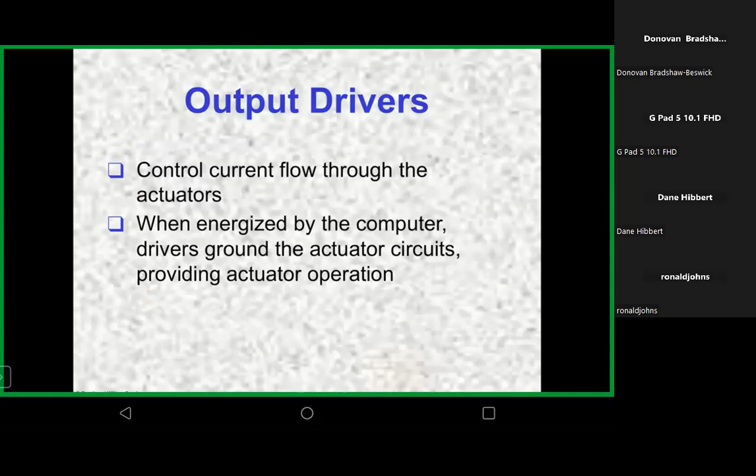Processor memory bus is a pathway by which sections of a computer communicate. The microprocessor controls this flow of data, writing data about vehicle operation into memory, and reading data about how the vehicle should operate from memory. So it always has a reference. If it gets information from sensors, and based on that information, it determines this is not how the vehicle should be operating, it will either trigger the light and say something is wrong, when compared to memory.

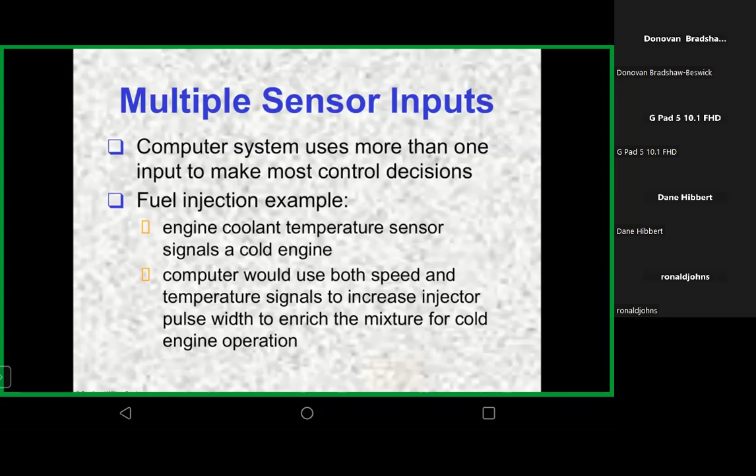All right, multiple sensor inputs. So the computer system uses more than one input to make most control decisions. A fuel injection example: the engine coolant temperature sensor signals a cold engine. So with a cold start, the computer would use both speed and temperature signals to increase injector pulse width to enrich the mixture for cold engine operation.

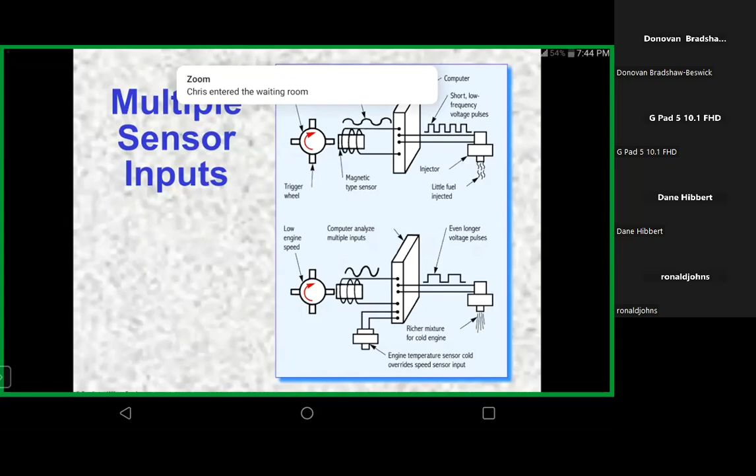And this is an example of that. So we have low engine speed, our trigger wheel, and low frequency going in. We have a computer and short low frequency voltage pulses, so very little in short pulses - say you have the fuel basically trickling from the injector. In the picture below, you actually see the frequency increase with the cold start, and the temperature sensor is incorporated in this. So the engine temperature sensor cold override takes precedence over the speed sensor input.

And then we have our even longer voltage pulses, and we have more fuel going into the cylinder for the cold start operation.

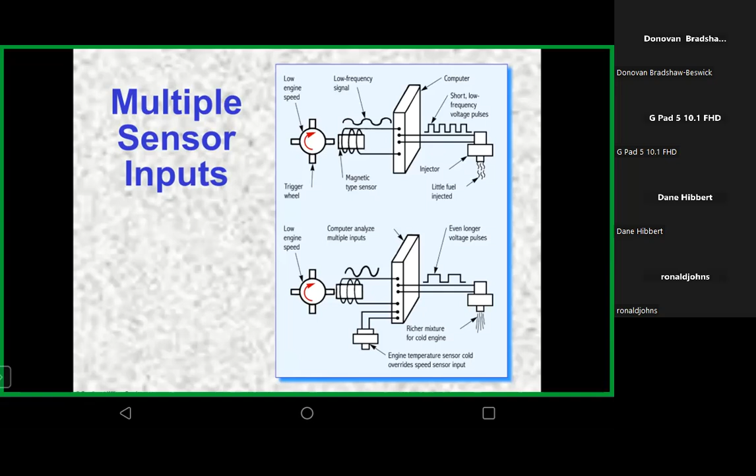Computer networks are a series of computers that control different systems but work together to improve overall vehicle efficiency. They share wires, input signal and output signal. Computers exchange data from sensors to prevent duplication of parts and to reduce wiring.

So what that actually means is multiplexing, or you can call it CAN communication lines. You can have that as an example, like me now. Say for instance I am a sensor talking to you guys, and instead of calling all of you individually on your phone, we just do a conference call. So I can communicate to all of you through one line.

So would I have a reduction in the number of wires? We'll have lighter components. So one person speaking, everybody hearing. Same thing with the computers communicating with each other.

But the thing with that though, the computer that actually needs that information will use it, while some will just let it pass because it's not related to them. So you have the information passing, whoever wants it takes it. The sensor speaks to everybody, so whoever has use for it goes and uses it.

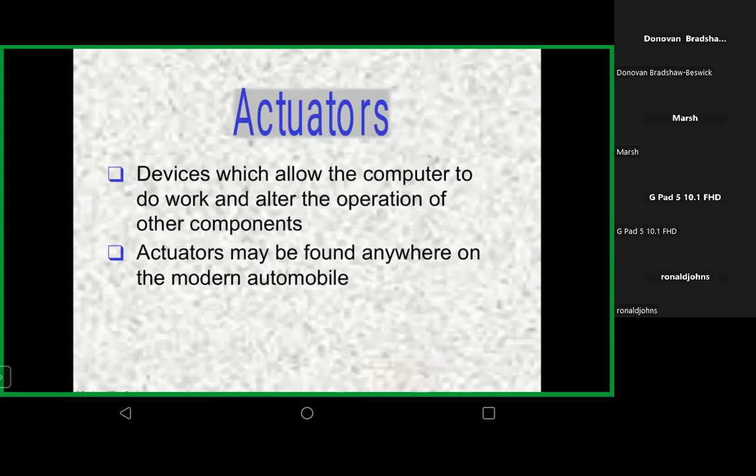So actuators would be like the computer sending out a boy - alright, do this, so it does that. So it actually commands them to do work, right? And sensors now would be like messengers, in other words. So one is a messenger and one is a send-out boy, in layman's terms.

Actuator classification - actuators can be grouped into the following categories: solenoid, relay, servo motor, display device, and control modules.

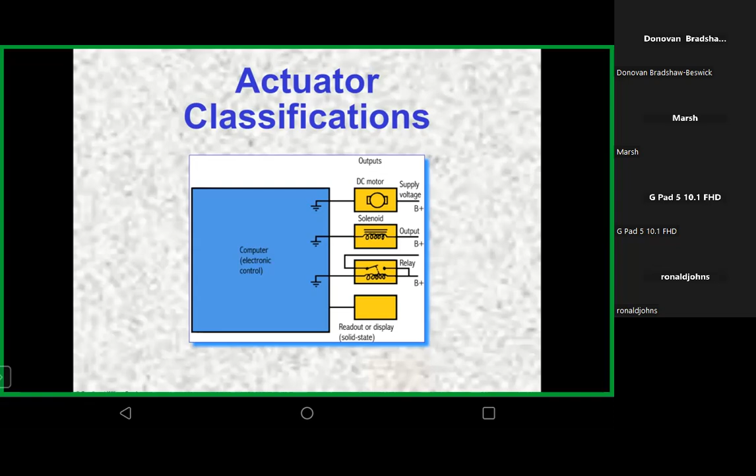Actuator operation - when the computer turns on an actuator, it normally provides the device with a ground circuit, as I was saying. Current can then operate the actuator.

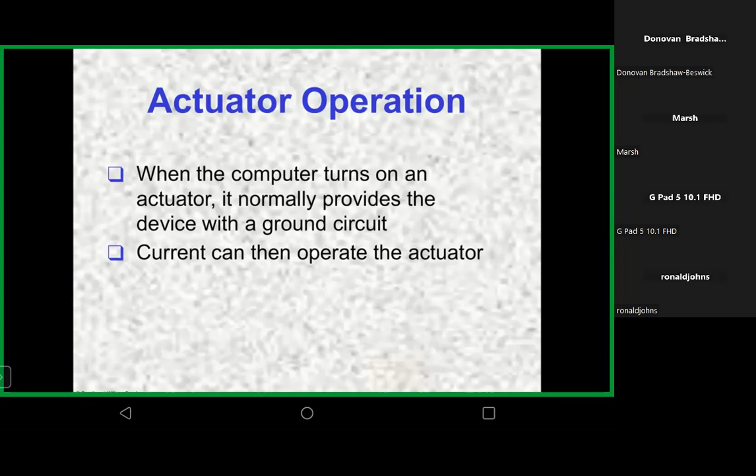So the computer actually - no, the processor actually communicates with the actuators through drivers. For instance, if you apply 12 volts to a light bulb, if no ground is present at one leg, the positive will go flow through the bulb and go through the rest of the circuit. So they do that so you don't have 12 volts flowing into the computer itself and burning the microchip. So the driver, as I can see, is a diode.

That little triangle sign shows the direction in which the signal can pass - it's a valve, in other words. The diode is a valve. You follow? So if the computer is not sending a ground, the positive will flow through the actuator and back into the circuit. It will stop right at the driver - it can't pass unless the driver is malfunctioning. Then you will have the current flowing in the wrong direction and damaging the computer itself.

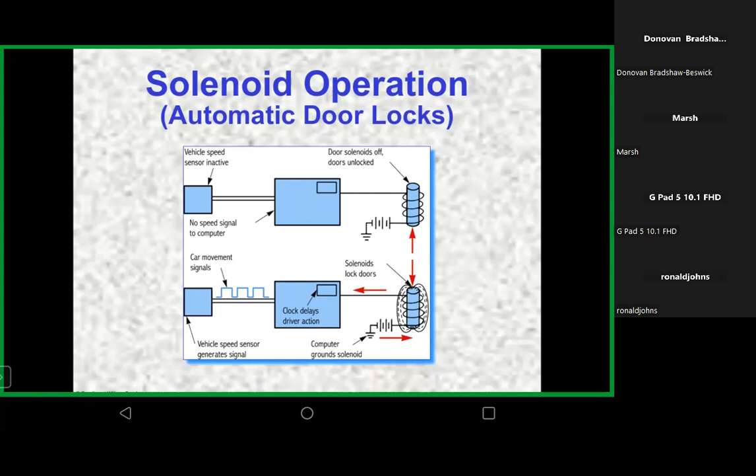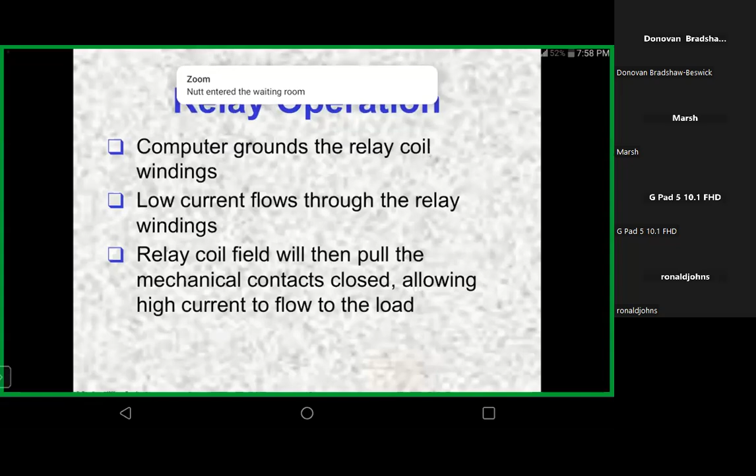Anybody know what a relay is, or how you would define a relay? A relay basically is a switch.

Any other deeper definition, more in depth? Simple, but more detail. Yeah, a relay is basically like a coil which operates off of magnetism. So once energized, it creates a magnetic force inside which then pulls down one side of the circuit to close the circuit, or open the circuit, depending on which type of relay it is. I have like 5-pin relays that are normally open or normally closed.

So basically we can say a relay is an electromagnetic device that uses a small voltage to control a larger voltage, right? And the reason why I use that definition is because, say for instance, the ignition bar, especially with button start vehicles, uses like 20 gauge wire, very small wires. So just imagine those small wires running directly to the starter. As I press it, the circuit should burn up. So what they do now is just use small wire.

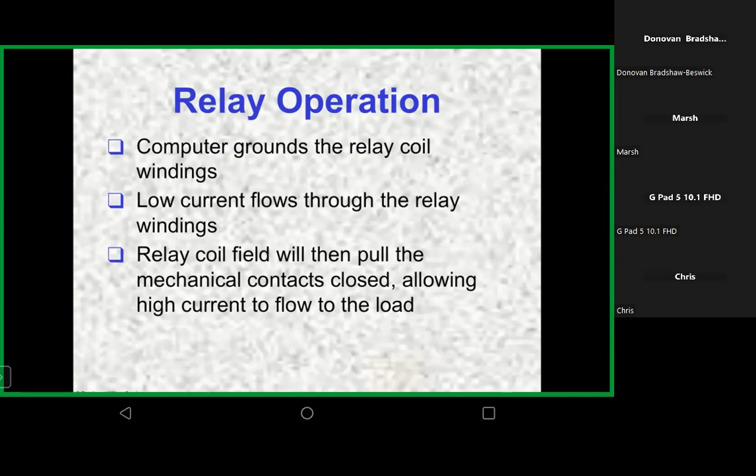Or a small load to control a high load or a large load. All right, so relay operation.

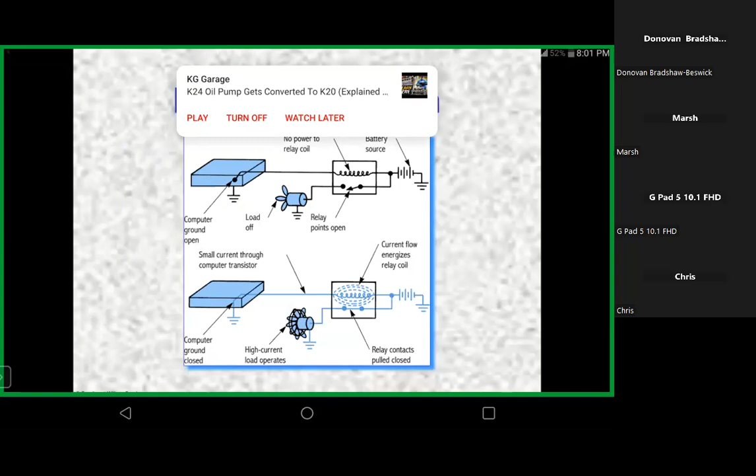Once the computer is grounded, the relay is energized. That magnetic field actually closes the switch and then current flows from the battery to that fan or motor, whatever it is. The top diagram shows when it is not energized, and the diagram below shows when it is being energized. So high current load actually operates the fan.

Yeah, hello? Yeah, I'm hearing you. I just reached home, so I switched now to my home Wi-Fi.

Sorry about that. A transformer could be considered an actuator too. Transformer.

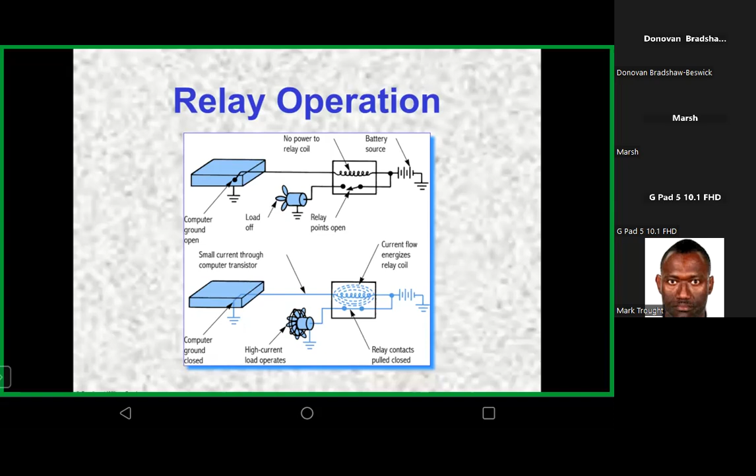I'm just trying to think. No, I'm going to say that because the computer wouldn't actually command the transformer to do anything. The transformer is actually doing its own duty. Okay, that's what you mean. Yes, so its duty is to either step up or step down voltage.

Yes, and it constantly... but at the same time, it's an integral part of the computer because the computer now deals with high voltage, so we always have to have a transformer to actually step down the voltage for the computer, or convert it from AC to DC. So it still works, but I wouldn't consider it an actuator.

Yeah, okay. Understood. Yeah, man.

All right, so the servo motor is our next one. Servo motor operation: the computer can ground the motor circuit for so much time. At no time should you say the computer controls the 12 volt, it's the ground. So for every device we move to, the computer controls the ground. The computer can ground the motor circuit, turning the motor on or off, or reversing motor rotation as needed.

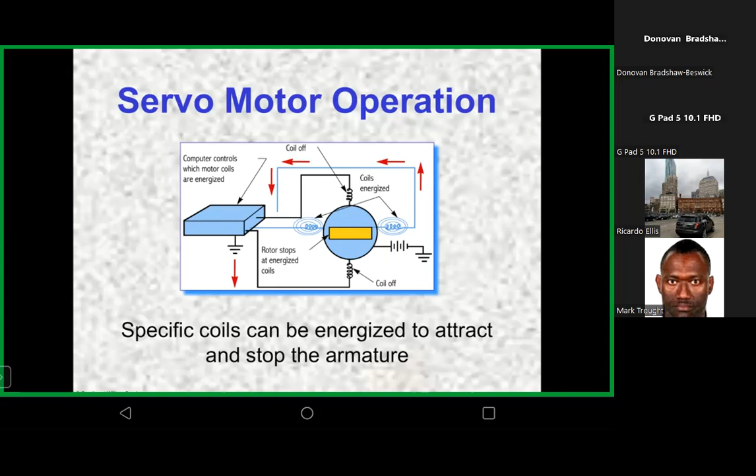So specific coils can be energized to attract and stop the armature. Common actuators used on modern vehicles include fuel injectors, solenoid valves that control fuel flow, and the fuel pump, an electric motor driven pump. Components are endless, so anything you can classify as an actuator is anything that the computer can tell to do work.

Once you turn on the ignition, the computer tells the pump to prime. You're gonna hear the pump prime and stop. Once you turn on the ignition, the computer will command it to spin constantly. If you're stepping on the gas pedal, like flooring it, or increasing the RPM, the computer can tell the pump to spin faster so it can supply more fuel, because more fuel is needed in the rail.

Like for a turbocharged vehicle, at lower boost settings, the computer will command the pump to spin at a certain RPM or speed. As boost increases, fuel has to increase with that, so the pump will actually have to spin faster. So that can be computer controlled and classified as an actuator, something as simple as a fuel pump.

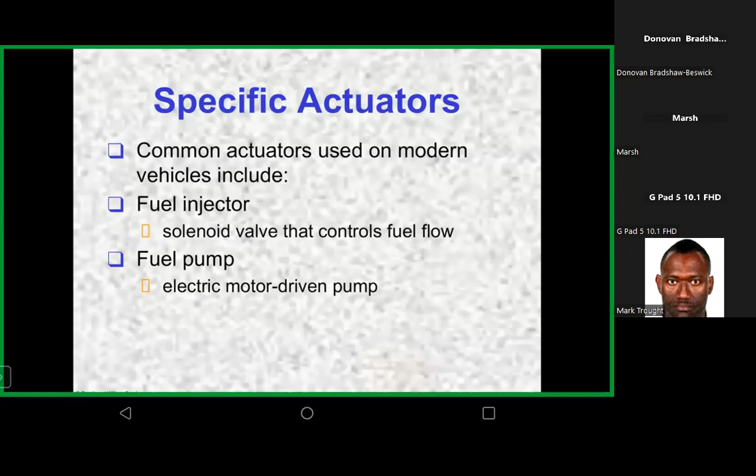Still on specific actuators: the idle air solenoid. That can be like an idle up valve - when you turn on the AC, the valve compensates for the added load so the vehicle doesn't stall, whereas at closed throttle or no throttle position. While some vehicles don't use an idle up solenoid, the electronic throttle body itself, the computer can just change the position of the butterfly to compensate for the AC being turned on, while some just use an idle up solenoid.

That controls airflow into the engine to control idle speed - a reversible DC motor that opens and closes the throttle valve to control idle speed. The EGR solenoid opens and closes small ports to control exhaust gas flow back into the engine.

Now we have our canister purge solenoid, which controls flow of fuel vapor from the fuel tank into the engine for burning, and that triggers during cruise - probably up to 2,500 RPM and below.

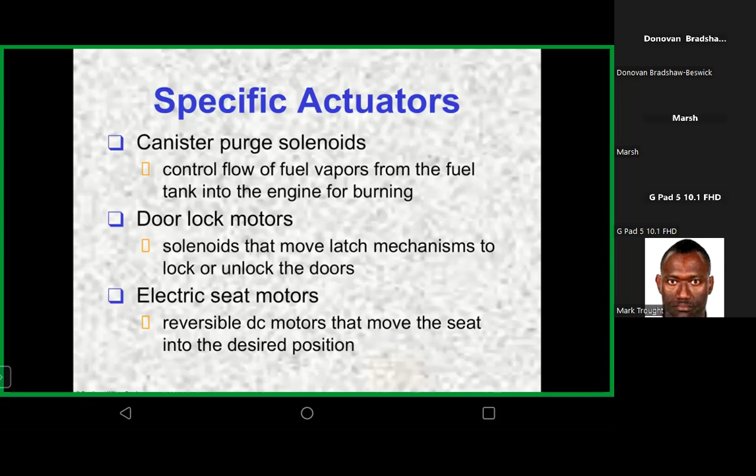So who knows now is going to do it? I didn't mean to cut you off, but it's something everybody should know, it's not even optional. Even the pump attendant should know about it. But I guess the gas station wants to make money too, so they want more gas to get in. We live in our world, trying to get these products out. It could kill somebody doing it.

So the next component is the ignition coil. It changes low voltage into high voltage that operates the spark plug.

So for the person who asked about the transformer, this probably answers your question. You can look at the ignition coil as a transformer, basically a step-up transformer, in the form of an ignition coil. The ignition module uses computer circuits that control the operation of the ignition coil. As I always say, we're controlled by a ground - we always have a 12-volt live on the coil wire. As soon as that ground is missing, that 12 volts collapses into the secondary circuits, inducing a large voltage to the spark plugs.

So the ignition module is a computer itself that controls the ignition coil, and it can get feed readings from things like the crank position sensor, cam sensor, and similar components. The computer goes directly in dialogue with the coil because the coil actuator normally has a 12-volt live on it at all times once the ignition is on. So the module, or the module driver, acts as a barrier to prevent that current from flowing into the computer processor itself and damaging it.

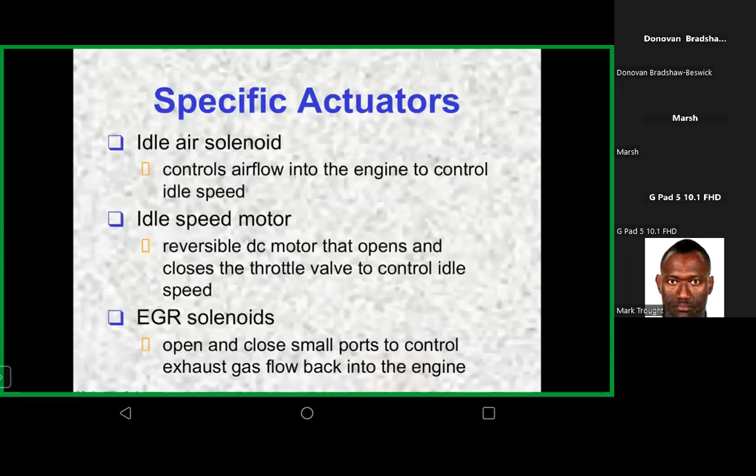As I can see, the driver, the output driver, or I can say module, right? The computer talks directly to the module. So it commands it. As I always said, the computer actuator is anything that the computer tells to do something.

So it's a send-out, right? It tells the driver or the control module, say, yo, tell the coil to fire. So it commands it to do that work, and it has to carry out that task because the computer tells it. So it's an actuator.

So once I can command you to do something, you're a slave to me then. So an actuator is a slave. So look on it that way.

But why does it use the driver or a module? As you can see, those triangle things that you see in the driver, they are diodes. And what we know about diodes, current can flow in one direction through a diode, right? One direction.

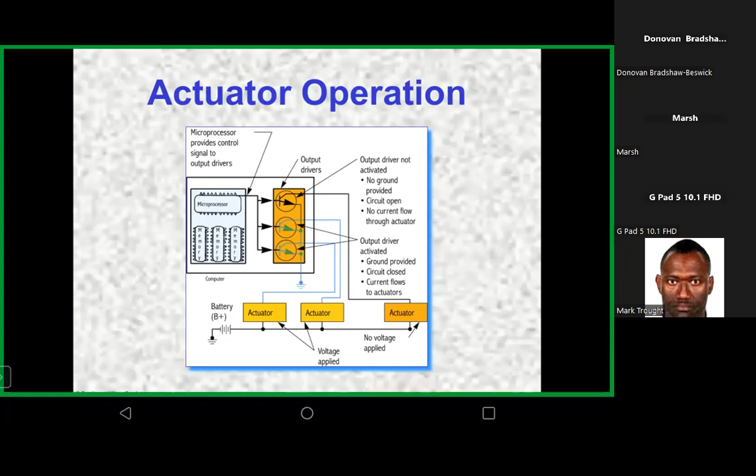So because the actuator always has 12 volts present when you turn on the ignition, if you never had a diode, which part would that 12 volts go? Right into the computer, right?

Because once you have a coil of wire it should operate on a negative and a positive. If you put positive alone on it, the positive will flow through the coil and go right through the circuit and go right up to the computer.

So the computer, it's just like you're gonna look on it like a drug kingpin. Nobody talks to the boss, but he always has a middleman.

Especially if you watch a Mafia show, they have young men who do the work, and then you have another person in dialogue with them, so some of them don't even know their boss. So all these actors know is that somebody told them to do something, but they don't know who commanded that person. So you can look on it from a real life scenario.

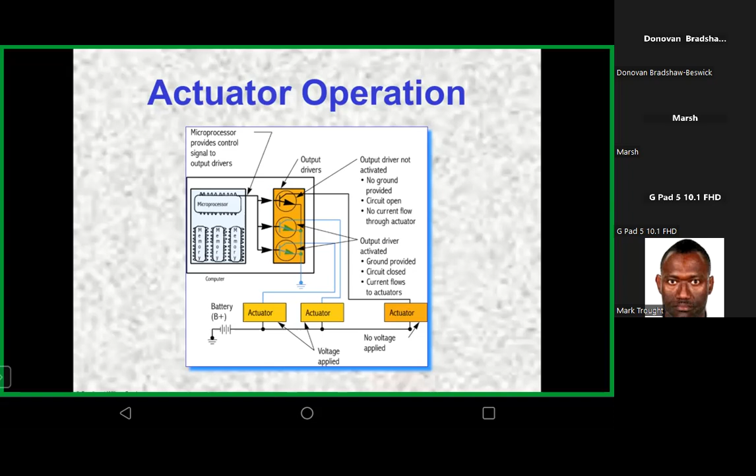So that's how the driver, the module, comes into play. And that's why we say we have CAN communication, where modules communicate with modules. Networking.

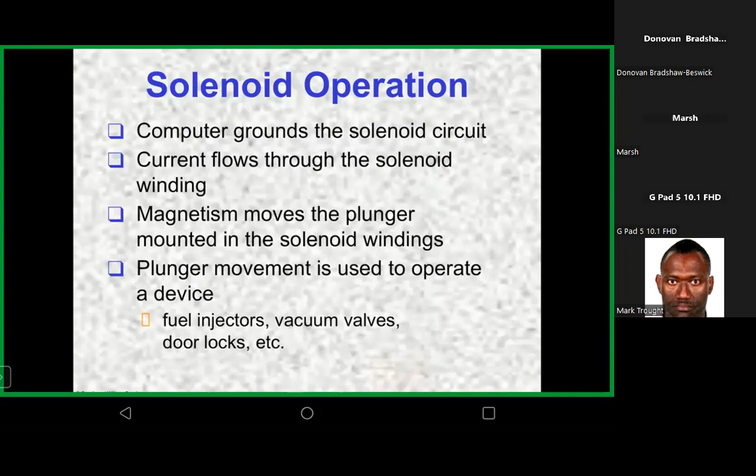Oh, so I think at the end of the slide here, this. So give me a second, I'm gonna switch over to the other chapter.

Everybody seeing that? Yes. Oh, all right, I'll go on then. Yeah.

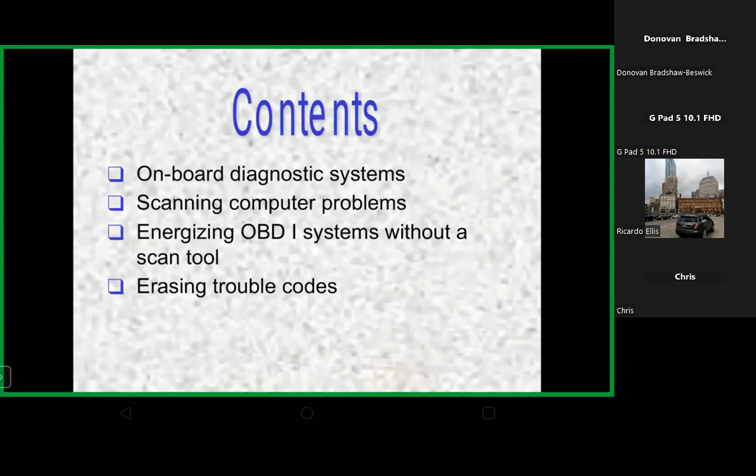You know, we kind of step away from the OBD1 system actually, and modern, most every vehicle from 2000 onward uses the OBD2 system. All right.

So onboard diagnostic systems, modern automotive computer systems are designed to detect problems and indicate where they might be located. This has greatly simplified the troubleshooting of complex automotive systems. All right.

So OBD1 systems, that's pretty much any system from 99 backwards. So below 2000 we have OBD1 systems.

Most early onboard diagnostic systems could only check a limited number of items. Diagnostics were often unable to isolate problems within a circuit. There was little standardization—each manufacturer used different connectors, terminology, and trouble code identification. So back then, the technology and the system were difficult to deal with.

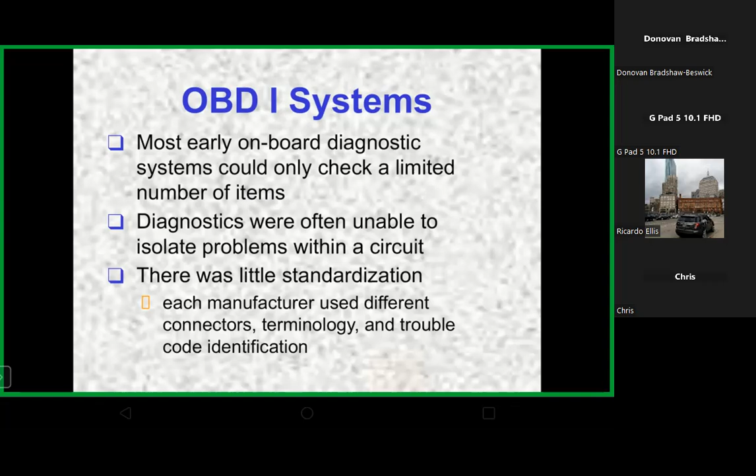OBD2 systems are designed to more efficiently monitor the condition of hardware and software that affects emissions.

We don't always know everything these systems do nowadays—every computer we develop for these modern vehicles is concerned with emissions.

Diagnostics can detect part deterioration, not just complete failure, especially with stop-start vehicles, because the starter actually gets used more than in a regular vehicle that doesn't have a stop-start system.

When we say stop-start system, it's that feature where if you slow down or stop in traffic, the vehicle automatically switches off. Then if you unbuckle the seatbelt, turn the steering, or lift your foot off the brake pedal, it starts back up and you proceed. That prevents you from burning unwanted fuel while idling, saving fuel at the same time.

Because those types of starters normally have to go through more start cycles, the computer actually monitors it. After a certain count, it can show a code telling you that you need to service the starter, warning you before it actually breaks down—rather than waiting until one day it switches off in traffic and won't start back up. So it gives you a heads up that it's soon time to replace or service the starter.

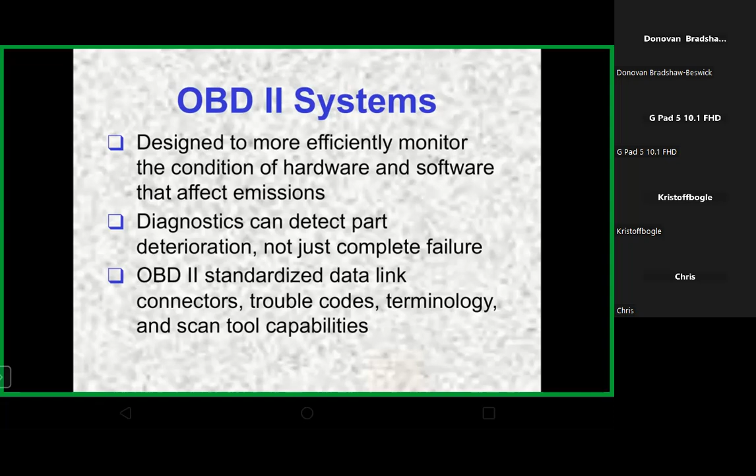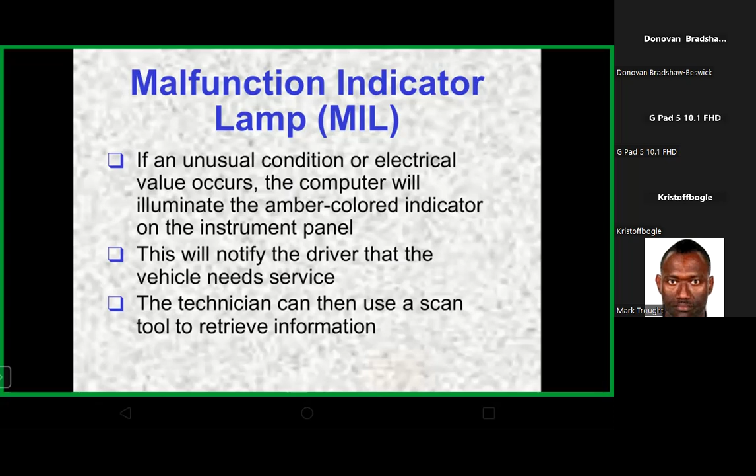So I'm going to shift to this one. All right, so a malfunction indicator lamp, the MIL or check engine light, more popularly known as - if an unusual condition or electrical value occurs, the computer will illuminate the amber color indicator on the instrument panel. This will notify the driver that the vehicle needs service. The technician can then use a scan tool to retrieve information. Continuous illumination means the trouble should be repaired.

So once the light stays solid, it doesn't go anywhere - that means repair is needed. A flashing MIL or check engine light means the trouble code - the trouble could damage the expensive catalytic converter. So once the light flashes, it means the catalyst is at risk.

So that could mean you're having a misfire. With my Nissan, once the check engine light starts flashing, I know a coil burned out. I'm going to start dumping gas, and once I start dumping gas it can clog up the cat. So the light can actually give you an idea of what's happening. Once you have a flashing light, you know you have an emission problem, meaning it can be a fuel injector or just say a misfire. Once you have a misfire, the MIL light will flash, but not with all vehicles though.

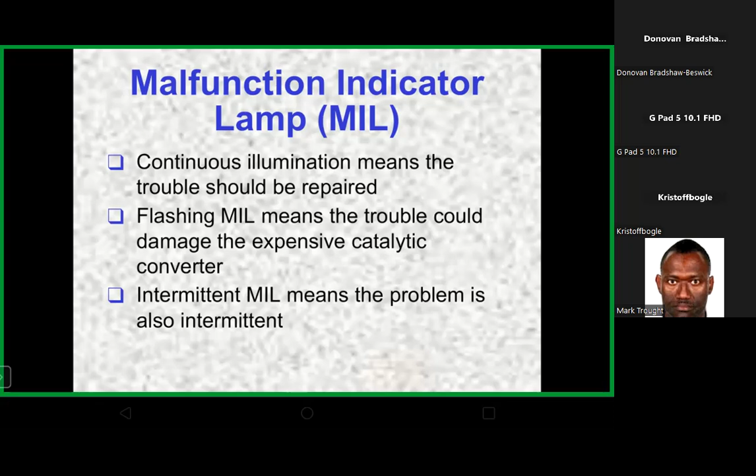All right, so intermittent MIL means the problem is also intermittent. So today the light is there, after a few cycles the light goes away - back and forth. Trust me, this is one of the worst problems to try and catch. You don't know if you fixed it, and you don't know if it'll come back until it comes back. So it's one of the hardest problems I have to deal with, compared to the one with the solid light on.

But can I ask a question - with all the circuits in the system, all the computers monitoring and sending signals to activate this and that, why would an intermittent light be such a problem? Just a brief example of why it would be such a problem with all the controls in the computer that send signals to open this and close that.

All right, with that now, everything has its limitation, right? And the thing is the computer constantly monitors sensors. So for instance, if the sensor is faulty, or the sensor just doesn't work today - lazy today - the computer will trigger the light. So the thing is with intermittent problems, sometimes the customer is not near a mechanic at the time to actually put the tool on it, and by the time they reach the mechanic, it's gone.

The reason why it goes away is because even though the component is faulty, the computer will still monitor it. So tomorrow it wakes up and says, right, I've got some work to do. The computer watches it run a few cycles and says, oh, it looks like it might work, maybe it was just a glitch, and takes away the light. Then shortly after, it does more work and finishes for the day, the computer watches it again and the light shows back up. By then the customer is probably a couple kilometers away, on the next side of the island.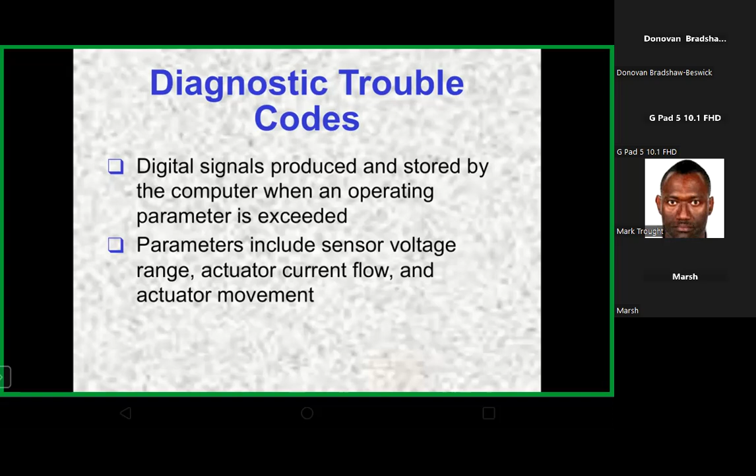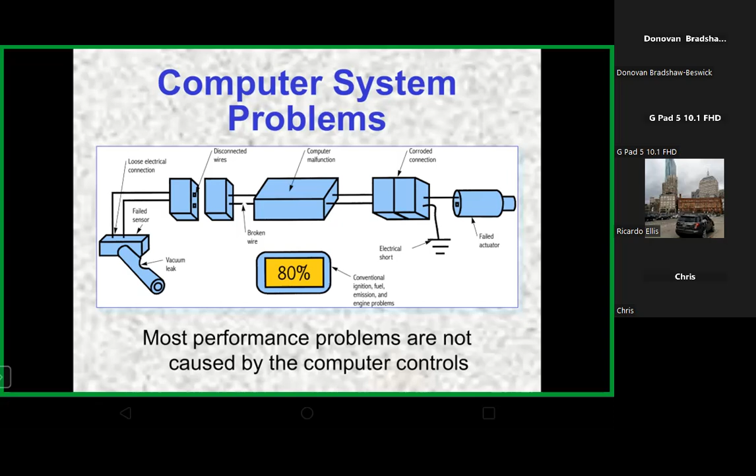But like with the Toyota's, sometimes we run the rejuve on them 2-3 times and the van still doesn't have power. We have to take it off and actually submerge it in fluid to do that particular process.

But can I say something though? You were saying that they're doing more things to improve on this, but the fact that vehicles are going electric, because most of the problem is from gas operated vehicles. Yeah, but going electric - you know, say going electric is just shifting pollution from one end to the other. No man, I agree with you on that point.

But in terms of these little figures, the OBD thing on the dashboard showing up, MIL light and all those things - it's really simple, the fact that you're using a gas vehicle, because some of those problems, can you say 80% come from fuel? Emissions would still come from electric, but not from the vehicle itself, maybe otherwise and engine problems. But the fuel system is really, most of the computer problems come from having to work on a fuel system vehicle.

I want to tell you funnily, these modern vehicles nowadays are made to burn oil. Because they might use a technology called low tension ring to reduce friction in the cylinder against the cylinder wall. First time piston rings used to squeeze tight against the wall, and that tight squeeze would create friction or a certain amount of drag. So the low tension rings now don't create that much tension against the walls. So what they use with those engines now is low grade oil, like 0W20 and 5W20. If you notice the grade is low, that now helps slip past the ring to help reduce friction.

So if you use thick oil, the wall and the ring will wear down fast. That's why the Step Wagons, most of them you would have to dash them, because they would have ring problems since people just throw in 10W30 instead of 0W20 and low grade oil, due to the piston and engine construction. But at the same time, they're made to burn oil, but you're not seeing smoke through the tailpipe.

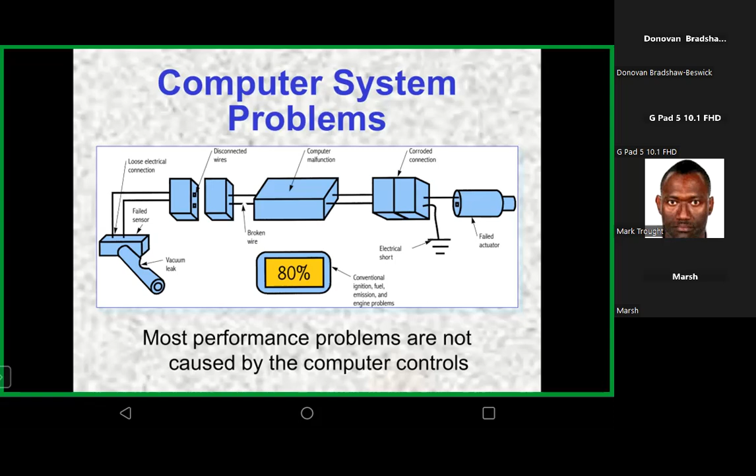Right? Them work, but it takes money to replace one of them catalytic converters. Like for example, the people who live overseas, you notice the men cut them off, 5 people in a car, literally. Also see a few videos with those, cutting off the cat.

Scanning computer problems. A scan tool is an electronic test instrument used to retrieve trouble codes from the computer's memory and displays the codes as numbers and words. Many vehicles also allow the scan tool to display input and output operating values. So in other words, I can do live data and actually see what's happening.

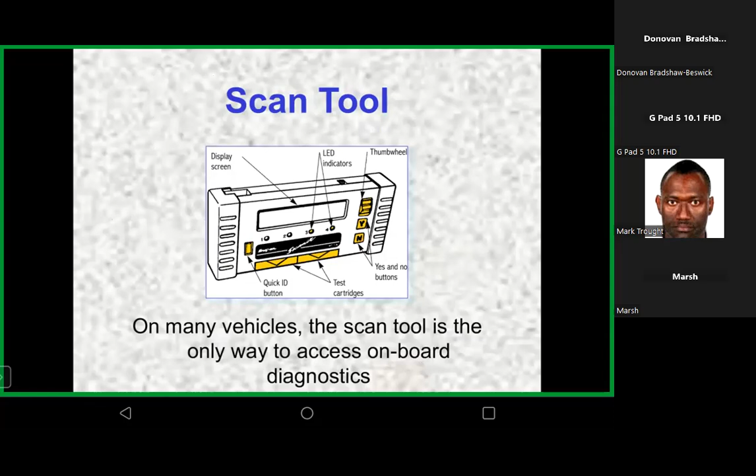Come on, so this one, scan tool, remember it's a show. On many vehicles, the scan tool is the only way to access onboard diagnostics. They may look like some older version scan tool kits. This is how all scan tools used to look like. It comes with the main harness, and then the others would adapt to it through the various manufacturers. So read the tool operating instructions, operating procedures vary.

So, scan tool program cartridge. Kind of.

Can I ask about scan tools? Is there one you can recommend that does both 12 volt and 24 volt?

Most of them can do it, but when you buy the scan tool, you're looking at the description. You may have one that can work on 12 volt only, while another can work on both. So once you go buy a scan tool, look at the description and it's going to tell you which systems can work on 12 and 24 volts, with all the modules it can check. But you know, you buy one, and next month you have to look to buy a next one.

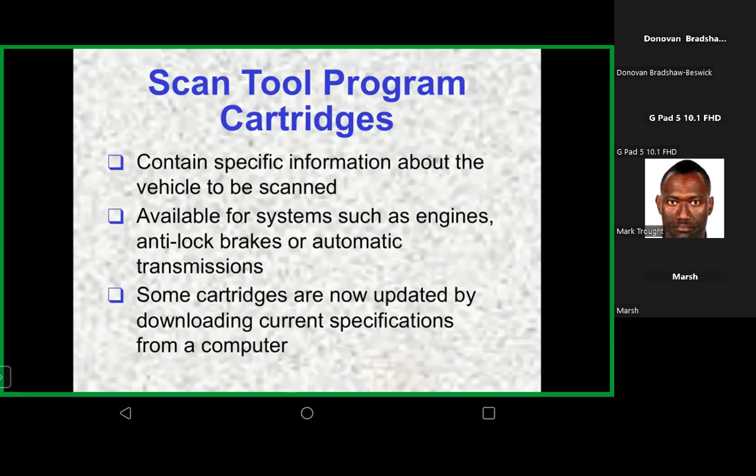So you see how things evolve.

Yeah, and the cartridge, I think of it like a game I can play. Most manufacturers release a new cartridge every 1 or 2 years. But the only good thing with that stuff back then, and even the same thing nowadays, is you could just buy the cartridge. Nowadays some of them have a subscription fee where you have to update the scan tool every year, and some of those fees can actually buy back a whole scan tool.

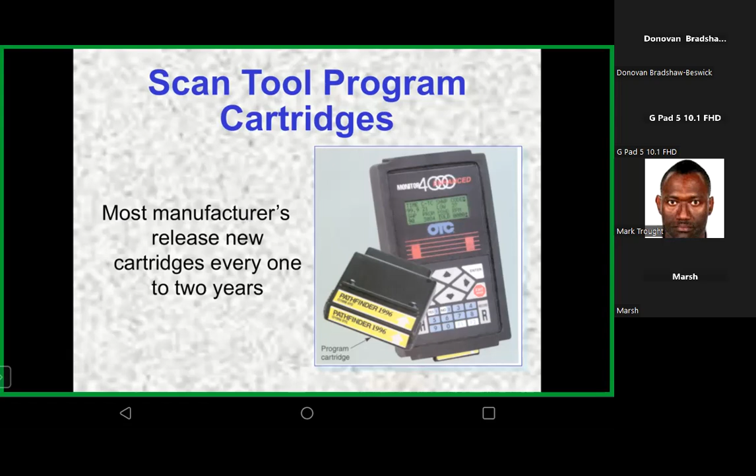But it's just like a Game Boy cartridge - when those cartridges collect dust sometimes they don't read. I remember we had to clean them several times. So the manual said, do not touch the cartridge terminals.

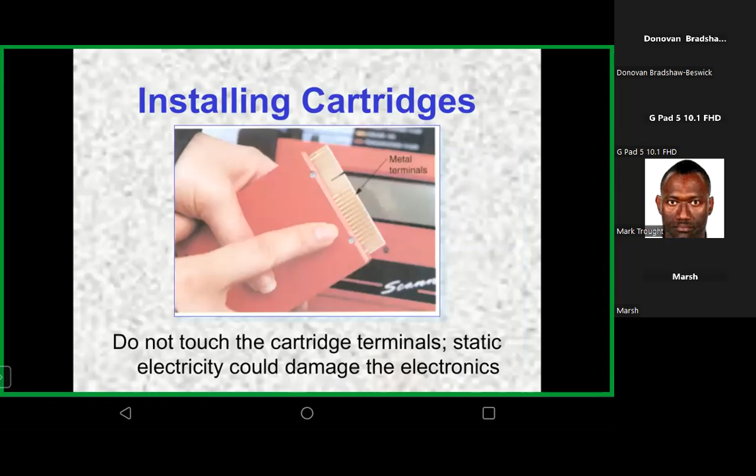Static electricity could damage the electronics. That's true for any chip or circuit board too, just touching it with a bare hand. That's why I see most technicians wear latex gloves or something like that.

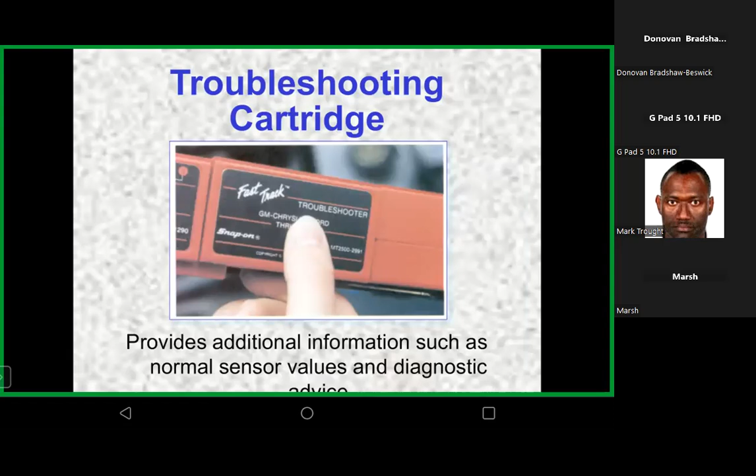So, troubleshooting cartridge - hello, I think we need to go through these because we're not in the cartridge world anymore. It provides additional information such as normal sensor values and diagnostic advice. Data link connectors are multi-pin terminals used to link the scan tool to the computer.

It's more standardized now, I would say. So once a technician goes to the vehicle to scan it, he'd wonder which part this connector is in right now - he'd have to search. So if he charges...

I program keys and do stuff like that - that's my main strength here. Yeah, and I still have to look all over the place, but in a more restricted area now, so they've narrowed down where you'd have to search.